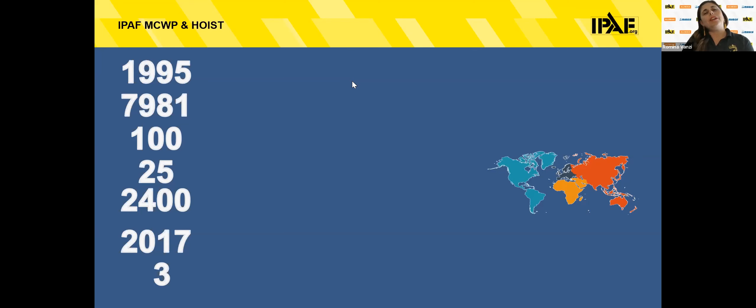So 1995 - what is 1995? This is when IPAF got involved in the mast climbing work platform sector. This happened in the UK around 12 years after IPAF was founded. We had some serious accidents in the UK, so the stakeholders of that time decided to get involved with IPAF to have an umbrella federation to deal with these safety issues.

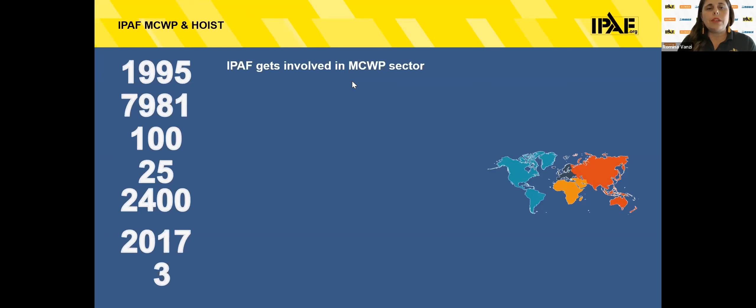Together they formed work groups, and one worked with the British Standards Institute to develop a code of practice for the installation, maintenance, thorough examination, and safe use of mast climbing work platforms. At the same time, the training program for the use of mast climbers was developed with the help of some of our members. This is when we really got involved as a federation with our members in the mast climbing work platform industry.

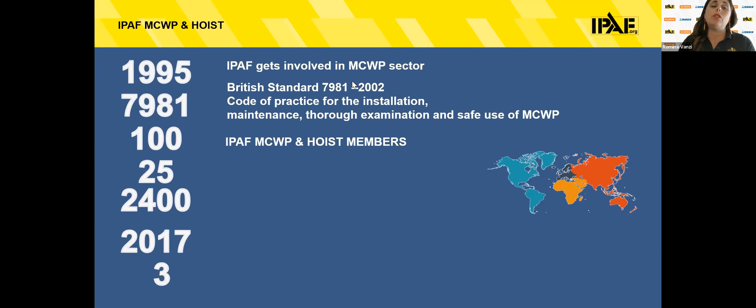Nowadays we have about 100 members within the IPAF family worldwide dedicated mainly to mast climbers and hoists, out of 1,600 total members. 25 of those are also dedicated to training - they are IPAF Training Centers for mast climber and hoist, issuing around 2,400 PAL cards worldwide, for operators, demonstrators, installers, and instructors.

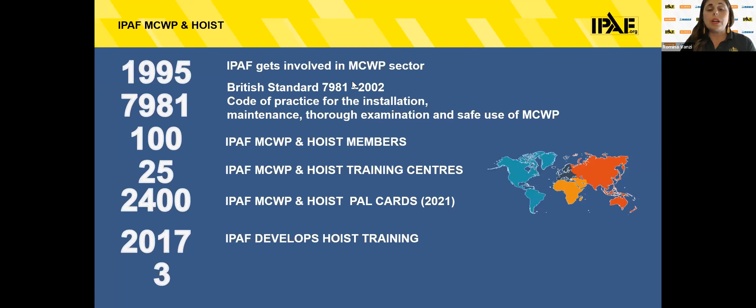In 2017, IPAF decided, after requests from our members, to get involved with hoists as well. At the beginning we only dealt with mast climbers, but hoists was a natural extension, since manufacturers and rental companies dealing with mast climbers also deal with hoists. We developed that training with the help of Agnès Llibre, our mast climbing and related products representative, and that course has been very successful since then.

3 is the number of dedicated committees and work groups IPAF has for mast climber and hoist: the International Committee, the UK and Ireland Work Group, and the recently created Technical and Safety Work Group, which we established after the HSE Safety Alert in the UK. We found the need for a specific committee dedicated to technical and safety issues.

Without any further ado, let's go to today's webinar speaker presentations. Today we have Angel Ibanez with us, and he will give us an update on the HSE Safety Alert issued by the UK Health and Safety Executive earlier this year.

We'll also look at the European regulation EN 1495 concerning safety devices. Then we'll have a presentation from Agnès Llibre, expert manager at AIDE, who will explore how the different types of overspeed safety devices work and the safety control system.

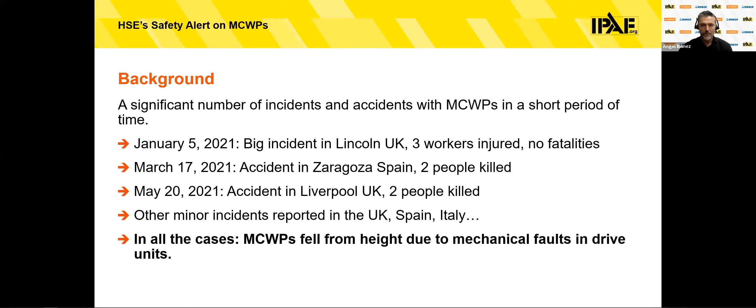In all the cases, they had a very similar root cause, and the problem was that the MCWPs were falling from height due to mechanical faults in the drive units. When a fault drive unit causes a fall from height in a twin mast configuration, in most of the cases, the machine can maintain certain integrity and stability, thanks to the fact that one of the drive units may prevent the other one from falling, as you can see in this picture.

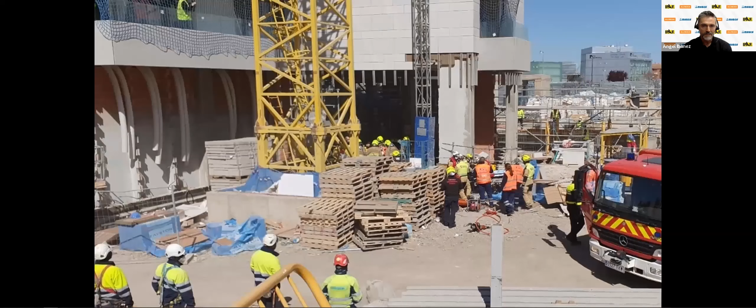Of course, this is an extremely dangerous situation, but in many cases, the occupants at least can save their lives. But when a fault drive unit causes a fall from height in a single mast configuration, the machine falls to the ground at high speed. And this is what happened in all those accidents I mentioned before.

So on May 3, 2022, the UK Health and Safety Executive released this safety alert. The main reasons for the safety alert were that some machines were not able to detect mechanical failure in drive units, leading to uncontrolled fall. Another important reason was that platforms could fall from height when mechanical faults in the drive units go undetected, and if this is not rectified quickly, the fall could cause serious injury or even death.

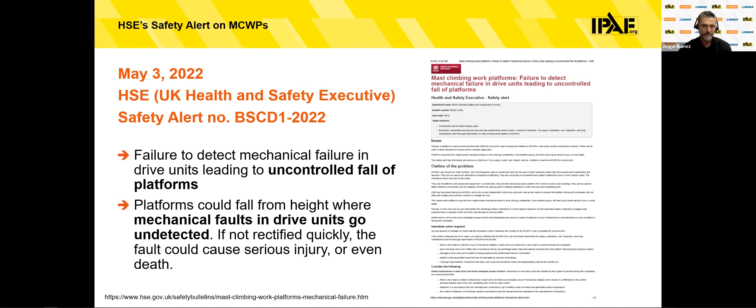The safety alert called for immediate action to check that the necessary control measures are in place for all mast climbers in use, ensuring 2 different things. One is that there is a means to identify a loss of mechanical integrity in each drive unit, which is the system to prevent falling from overspeed. And second, each individual drive unit is fitted with a mechanical device to prevent the machine descending at excessive overspeed.

So what is very important here is that HSE found that on some platforms, only one drive unit is fitted with a centrifugal brake, and they were also making a reference to the European standard for MCWPs, EN 1495.

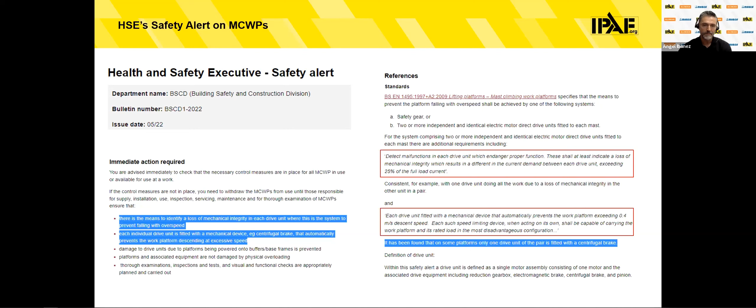On this regard, the details in EN 1495 related to this HSE safety alert are those explaining that all MCWPs must have a device or means which prevents the work platform from falling in the event of a failure. Chapter 5.5 of this standard says that this can be done in 2 different ways. One, explained in chapter 5.5.2, is using an independent safety gear. A different way, explained in chapter 5.5.3, is using 2 gear motors in each drive unit with a centrifugal brake and an electrical safety system.

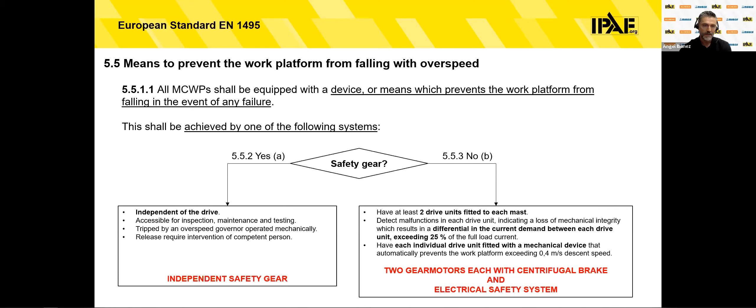So what implications does this safety alert have? Well, the main concern is that the HSE was calling for action to solve these issues detected in the market. So when the UK HSE alert was issued, it was initially a very significant shock for the industry to deal with. Many construction projects were threatened with delays and uncertainty, particularly as rental companies in the UK own fleets consisting mostly of the types of equipment referred to by the safety alert. So we can say that this had a very big impact among the rental companies in the UK.

Quite a few machines had to be taken out of service immediately. But this also had an impact in other regions, even not as big as in the UK, but there was increasing concern in other regions, like North America, some parts of Europe, or even the Middle East, as many users and rental companies were asking what was the root cause of this safety alert in the UK.

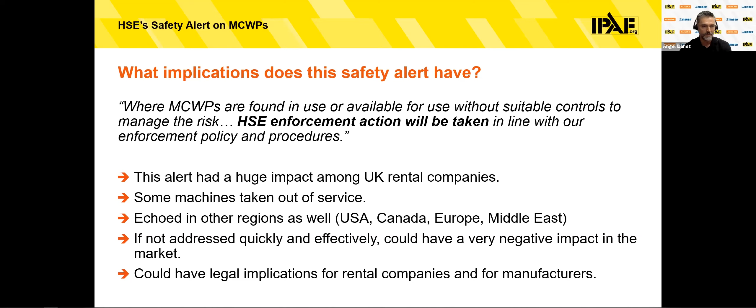Some manufacturers and rental companies were affected more than others, depending on which designs of MCWP equipment they make or hire out. So we all knew that if not addressed quickly and effectively, this could have a very negative impact in the market, not only in the UK, but worldwide. And this could even have legal implications for rental companies and for manufacturers.

So once the safety alert was released on the 3rd of May, IPAF moved quickly to help reassure end users and the HSE that all machines deemed unsafe would be stood down, while trying to coordinate a robust response from a safety and technical perspective. And since the release, IPAF has worked closely with members as they try to resolve all technical issues.

In the past few months, we have provided a link between our members and the UK HSE to clarify some aspects of the safety alert and to relay information back to the HSE about how some of our members are implementing measures to comply with the alert.

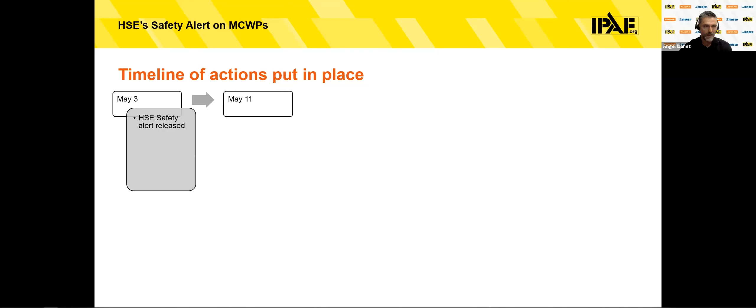So right 1 week after the safety alert was released, we held a physical meeting in the UK with UK and Ireland rental members and contractors. 1 week after that, we held an online meeting with global manufacturers from different countries. We held a joint online meeting with HSE to clarify some doubts about the safety alert.

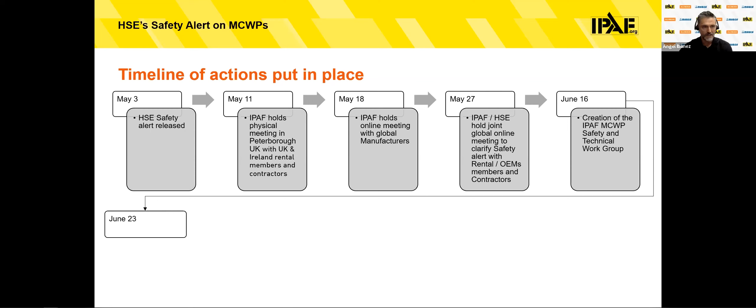And we created the IPAF MCWP Safety and Technical Work Group to address all these problems. We held the first meeting of this newly created work group in mid-June and the next one mid-July.

So we also focused on what could be done with the standards and regulations to update them if so required, to cover also the aspects reflected in this safety alert. And since July, IPAF is represented in the MHE 12/8 committee to review the British Standard Code of Practice for Mast Climbing Work Platforms.

And we are in continuous contact with the HSE and with the main industry stakeholders. Manufacturers, hire companies, and contractors attended several meetings organized by IPAF, in which it was decided that the industry needed to measure the likely impact of the safety alert, as well as to ensure awareness of the issues raised across the whole sector worldwide.

So at this moment, we continue to offer coordinated support to manufacturers, rental companies, and users to ensure that all ongoing use of the equipment is safe and fully complies with the technical and safety requirements outlined in the safety alert. Because the main target we have is to reestablish full confidence in the safety and efficiency of mast climbing work platforms.

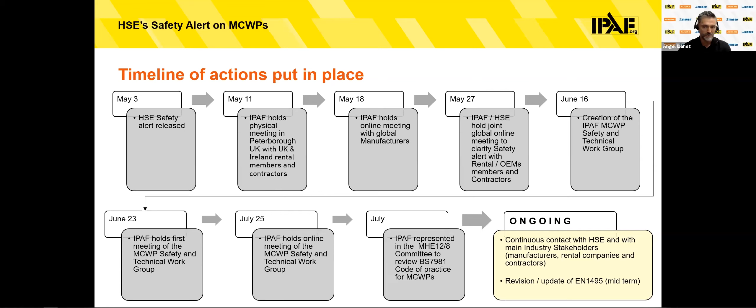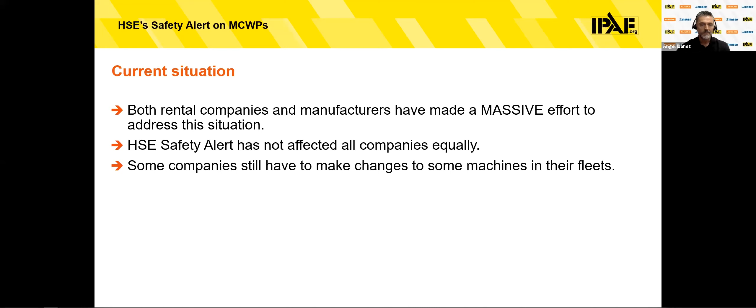And what is the current situation? We have to say that both rental companies and manufacturers have made a massive effort to address this situation. The safety alert has not affected all companies equally, and some companies still have to make changes to some machines in their fleets. But overall, we are really pleased to say that from a position earlier this year, when a significant part of the UK MCWP fleet was grounded, the fleet is now back almost at full capacity.

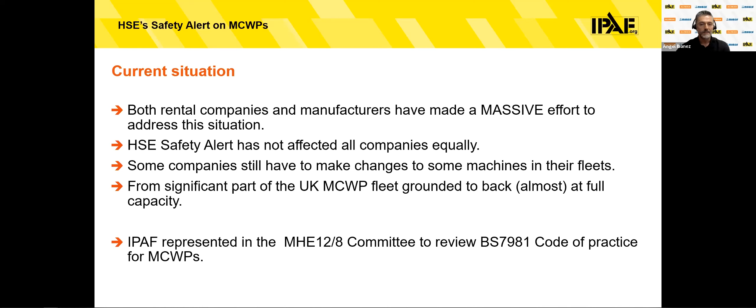IPAF put a formal request to CEN for a new work item proposal to update the European standard EN 1495. And we are also represented in the committee reviewing the British standard 7981.

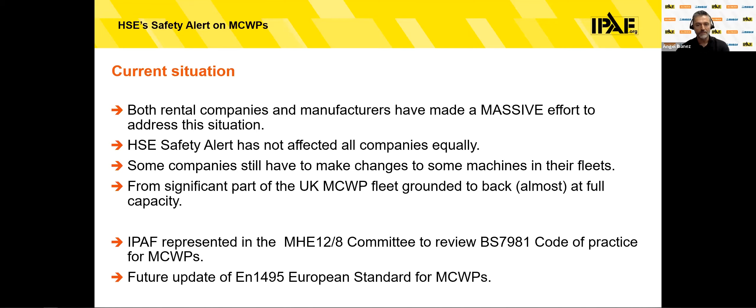So IPAF believes this means the industry is now even safer than it was prior to this alert being issued. And this is testament to the rapid response to the alert and the collective effort of all those involved in finding solutions. And what can we expect from now on?

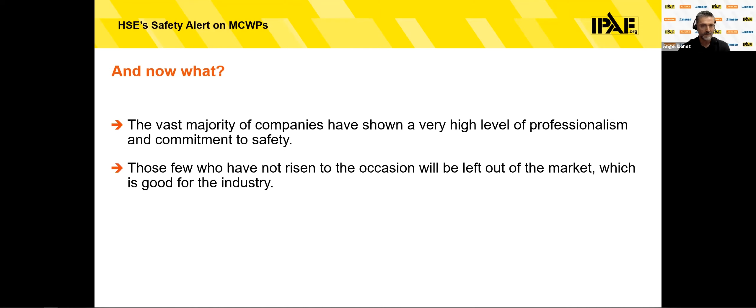We can say that the vast majority of companies have shown a very high level of commitment to safety. Those few who have not risen to the occasion will be left out of the market, which at the end of the day is going to be very positive for our industry. It means that after all this, the industry will be even safer. And we can say that MCWPs remain the safest and most efficient access method for facade work.

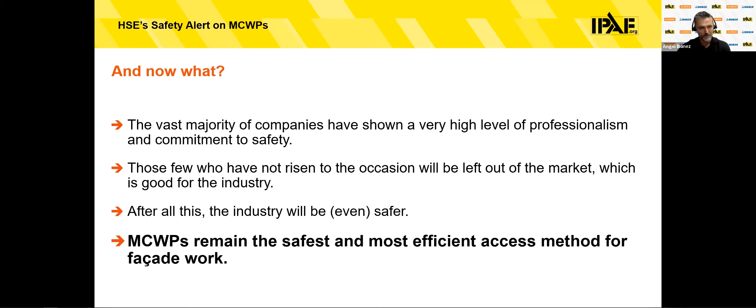Thank you very much, Angel. It's a very comprehensive summary of what happened in the last 6 months that kept us very busy. We kept busy, manufacturers were busy, and also rental companies. So, but as you say, probably this was reason why a good impulse to the industry and a good impulse to improve safety.

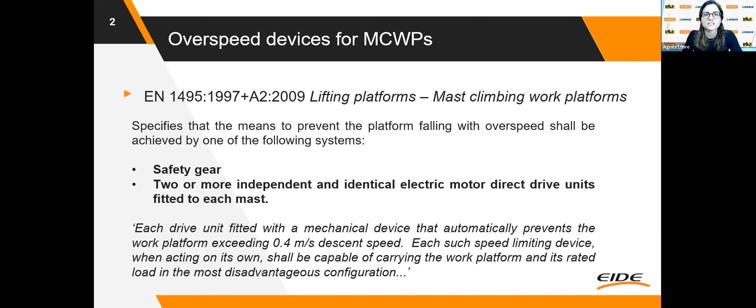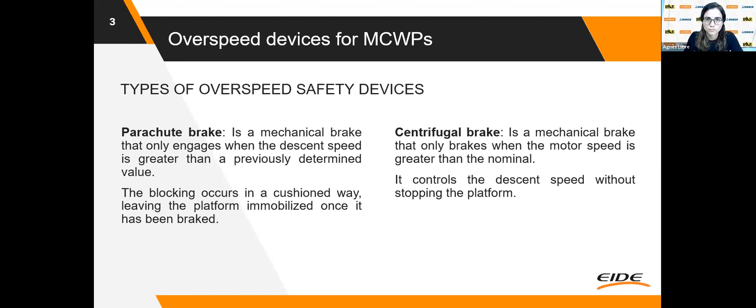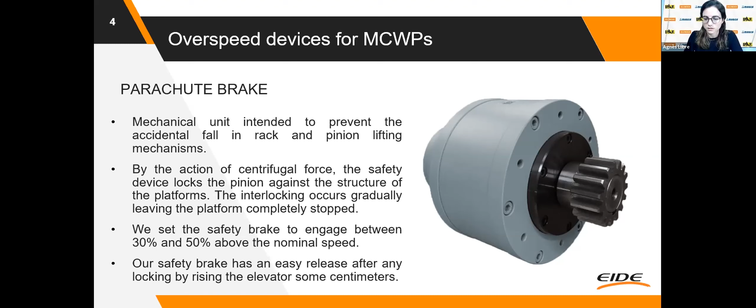The centrifugal brake is a mechanical unit intended to prevent uncontrolled fall in rack and pinion lifting mechanisms. The system starts braking when the speed exceeds nominal motor speed. The speed increases until the braking force equals the load force. The centrifugal brake acts between 10 and 20% above the nominal speed.

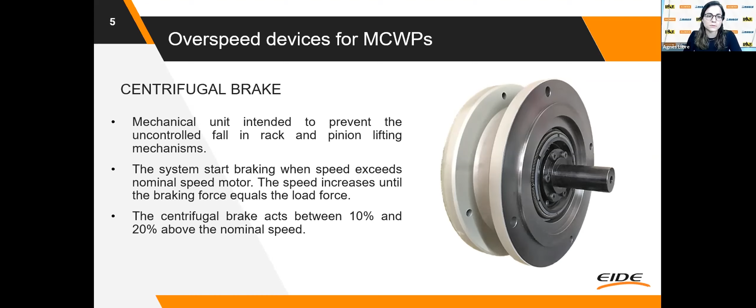The maximum safety ideally would be achieved by mounting a parachute and a centrifugal brake in the same elevator. But the centrifugal brake starts braking before the parachute brake, and it does not allow performing a drop test of the parachute. So the solution would be to remove the centrifugal brake each time it is necessary to perform a drop test, or to use an unlockable centrifugal brake.

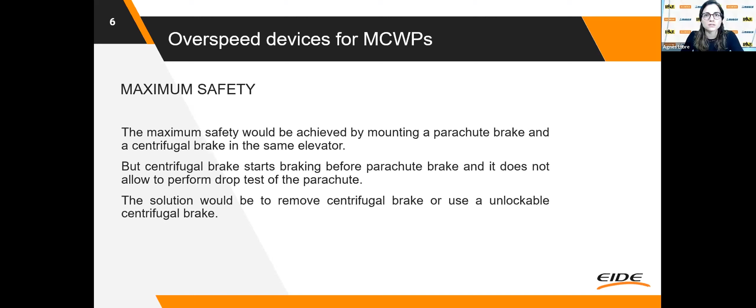The unlockable centrifugal brake is the same as the centrifugal brake, but with the main feature that it has a puller, so it can be disabled at will. This allows testing of the parachute and centrifugal brake without the need to disassemble any brake from the elevator.

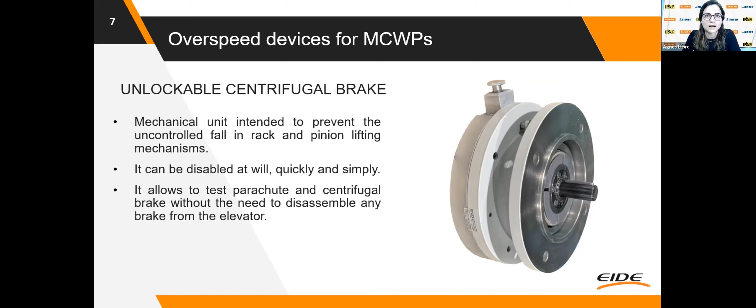And how to assemble these devices? The parachute brake is assembled directly to the rack with an independent pinion. Both the centrifugal and unlockable centrifugal brake are assembled between each motor and gearbox.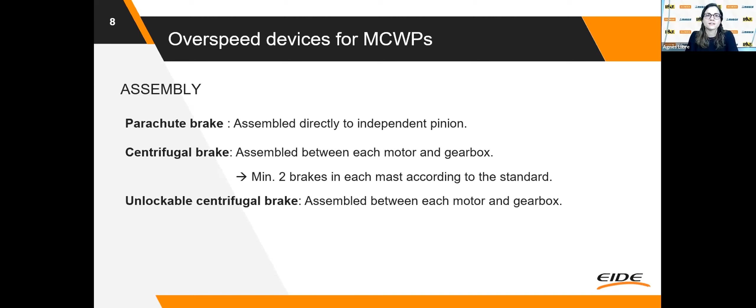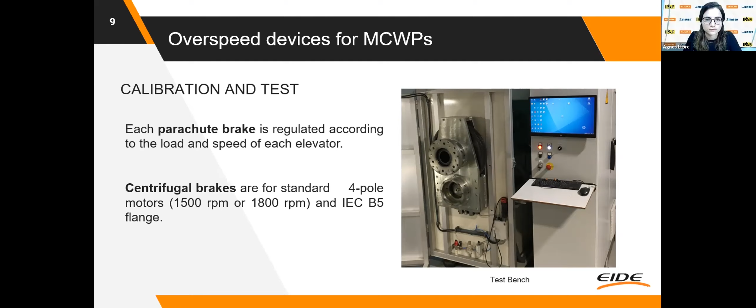For calibration and test: each parachute brake is regulated according to the load and speed of each elevator, and centrifugal brakes are for standard 4-pole motors. Here at EIDE, we have a test bench to simulate any elevator to test both brakes, centrifugal and parachute brake.

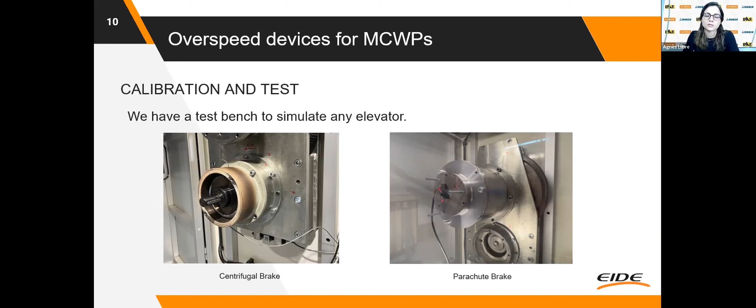To test parachute brakes, we perform 4 different tests, increasing the weight to check that tripping speed and torque is correct and accelerations are acceptable to accomplish the standard. To check centrifugal brakes, we test the starting speed and torque at the defined speed.

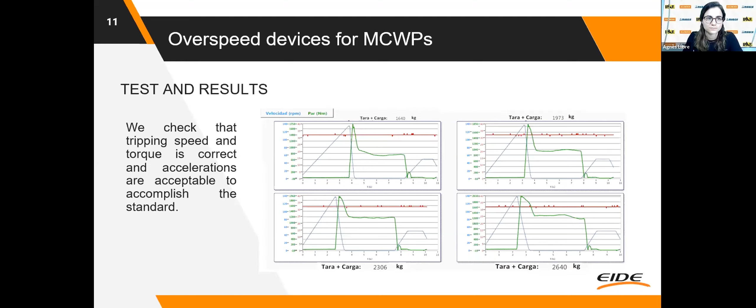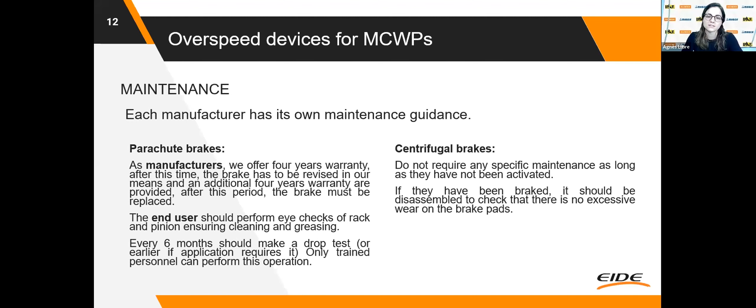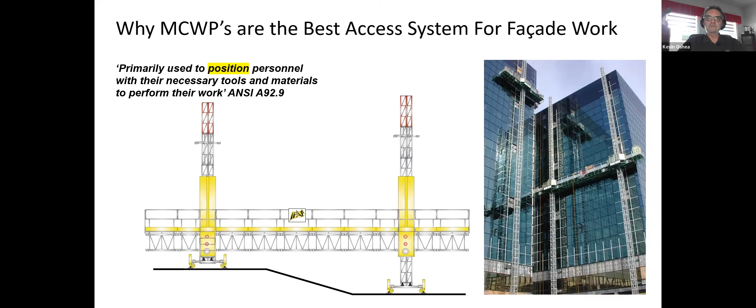It's important to state that, because Mast Climbing Work Platforms - and I have a photograph somewhere of the first one I ever found, from 1959, an old black and white photograph - this equipment has been around a long time. It's probably a good idea to state right off the bat that this equipment is designed specifically for facade work, and has been developed over the years for that exact function.

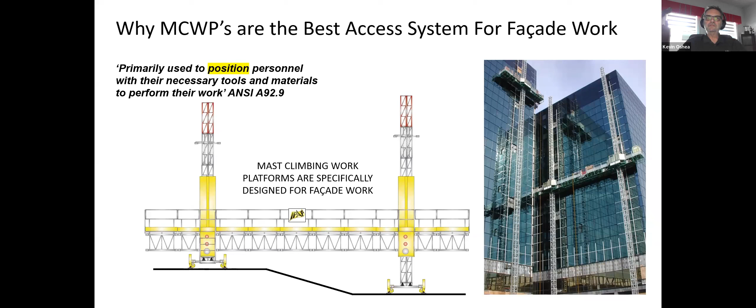So there are many advantages to the Mast Climbing Work Platform when it comes to facade work. One of the things that really makes a difference is the setup time and the footprint it leaves at ground level. If we take the example of a 40-meter long by 75-meter high facade, it's possible to cover that with only 2 masts, and therefore only 2 base or drive units. We only require a certain number of tiebacks to the structure to achieve this coverage. And with 2 masts in this type of setup, we're providing 3,000 square meters of coverage, which can be ready for use within 4 or 5 working days, depending on crew size.

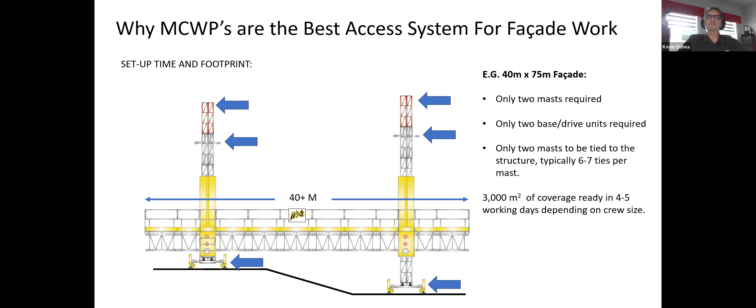So this product is really very important for facade access and facade work, and as I said before, it's specifically designed to provide productivity, safety, ease of use, and workflow in this kind of facade work.

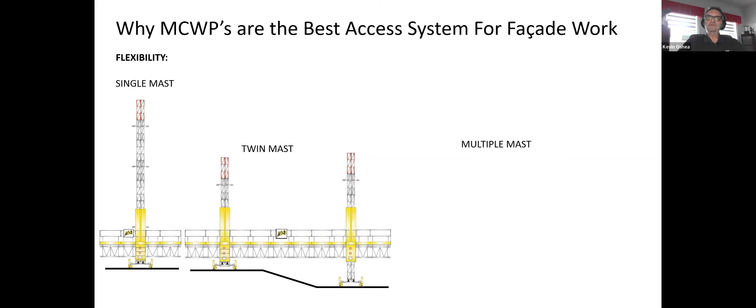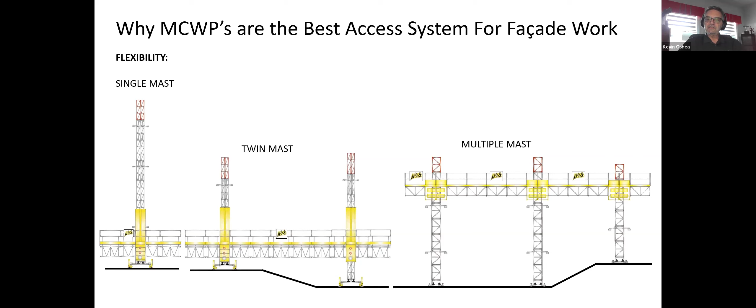There are varying configurations of this equipment which make it useful in various applications or work types. The standard one would be the single mast unit, which is one platform on a single mast. But we also have the ability to twin that product and provide a 2-mast unit. There is also potential to create multiple mast units, increasing flexibility, coverage, and productivity.

Additionally, we can create custom platform lengths with engineering input, where we may see machines with predetermined lengths or shapes and abilities, depending on the size, scale, or shape of elevations. We can also mount 2 units on a single mast, which provides further flexibility and productivity, and we can also provide inclined platforms.

An example of this would have been the construction of Terminal 5 at Heathrow Airport, where inclined platforms were used. So huge flexibility from basically the same mast climber. Obviously there are design aspects and safe use aspects, and depending on the configuration, there are capacity issues that need to be adjusted, but all of that can be done with expertise and knowledge.

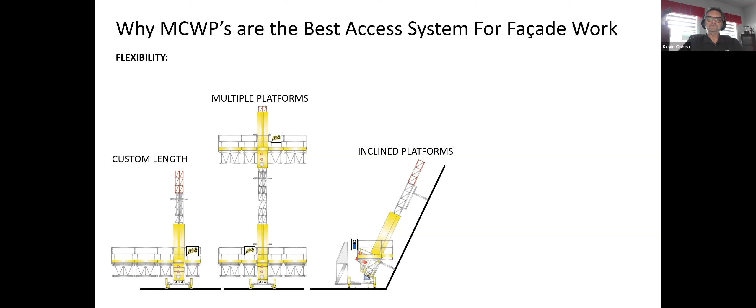Other possibilities in this unit - some units will stand or freestand to a certain height where there isn't an opportunity to tie into the structure. A big example in the American market would be when building a Walmart or Target store, where these constructed building units don't really have floor slabs - they have block walls, so the opportunity to tie in between 0 and 35 feet isn't there. So there are freestanding units capable of providing that function.

We also have the ability to put material hoists mounted on the platform to bring material up. Variable capacities are possible, specific to use. Some units - I'll talk in pounds since I'm discussing an American machine - some US machines are capable of lifting 20,000 pounds. So there are huge capacities available in certain units also.

There are also various methods for tying to structures, and these units can be powered in various ways, typically electric or engine powered. But the possibilities on mast climbing work platforms seem endless, and it really just takes expertise and knowledge to apply the best type of configuration, capacity, and product to the task at hand.

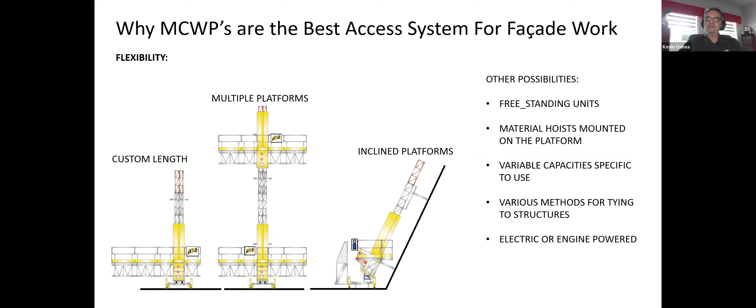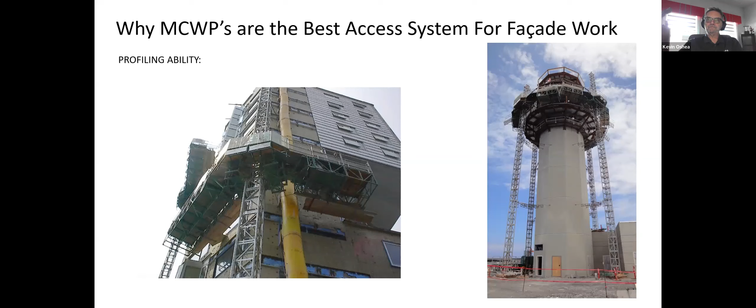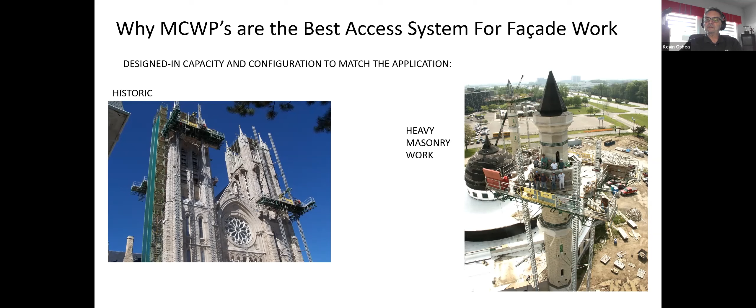Other aspects of use: on the left we have historic refurbishment work, which can be detailed and highly planned, but also highly productive and cost effective. On the right, this photograph shows a typical heavy masonry installation. So this product is amazingly flexible.

What makes the Mast Climber popular for facade work? To answer that, we need to look at the pros and cons of the other methods of access: scaffolding, booms and scissors, and Mast Climbing Work Platforms. Scaffolding has everything going for it when it comes to flexibility. You can construct it in whatever shape you want, so it's an entirely flexible system for facade work. It also has amazing profiling ability, and through design, provides high capacity.

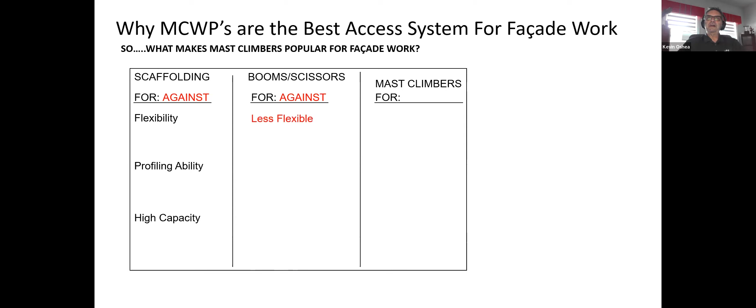Booms and scissors are less flexible than scaffold. They really can't profile - you're in a basket, so there's not much you can do to change that. Compared to scaffolding, they can have relatively low capacity. However, scaffolding has a long erecting time, while booms and scissors come to the job site rental ready. Scaffolding is only available at fixed levels, whereas booms or scissors can provide variable height capability at the touch of a button. Scaffolding will leave a pretty large footprint at ground area, while booms and scissors leave much less of a footprint for the associated elevation coverage.

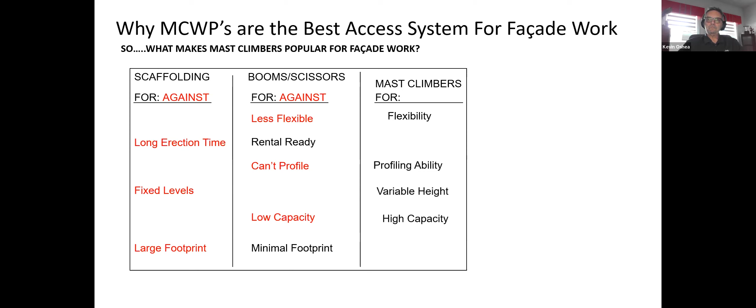Now let's look at mast climbers. Mast climbers have the advantage of the scaffold's flexibility - we can be flexible in the way that we construct. Mast climbers have the profiling ability that scaffold has, and they can also provide the high capacity. Also, they can provide variable height capability at the touch of a button or a lever, and they leave a minimal footprint at the ground. So almost all the advantages of scaffolding and booms and scissors are present in the Mast Climbing Work Platform product.

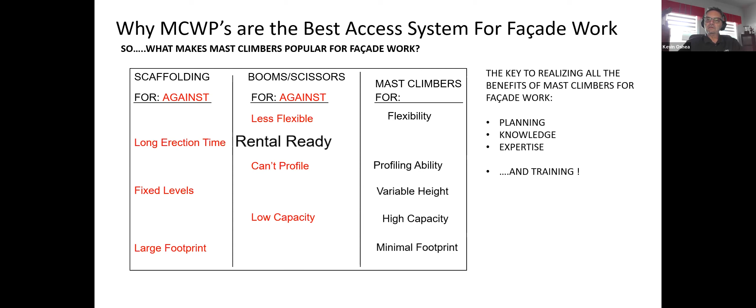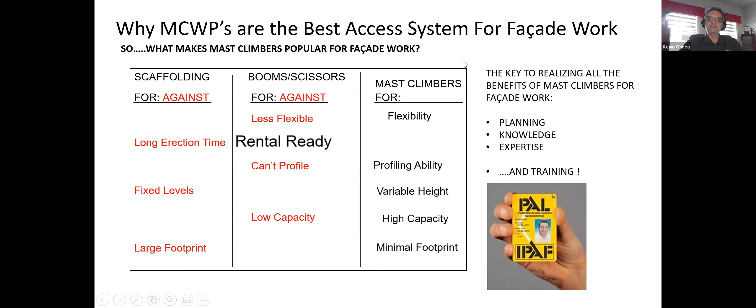The only thing Mast Climbers doesn't have as an advantage from the other two systems is that it doesn't come to the job site rental ready. That's where the key to realizing all the benefits of Mast Climbers for facade work is housed: in planning, in knowledge, in expertise, and critically, training. Good planning, good knowledge, good expertise, and comprehensive training will unlock the absolute benefits of this product for facade work. Thank you.

Thank you, Kevin. I think this overview you gave is very comprehensive, and very convincing when we have to show the advantage of mast climbers, because when we deal with booms and scissors, they are rental ready and you don't hustle too much since you bring them ready there. But sometimes the use of mast climbers has more advantages.

So Kevin was our last speaker today. Let's see if we have some questions here. Some have been answered online while we were speaking. We have mainly one question regarding centrifugal brakes - more a statement, that there is no indicating system to show when the C brake has been used. I don't know if Agnès, you have an answer to that. If you guys have a way of seeing if the centrifugal brake has been used, and if anyone else has any comment - Kevin or Angel? First, Agnès?